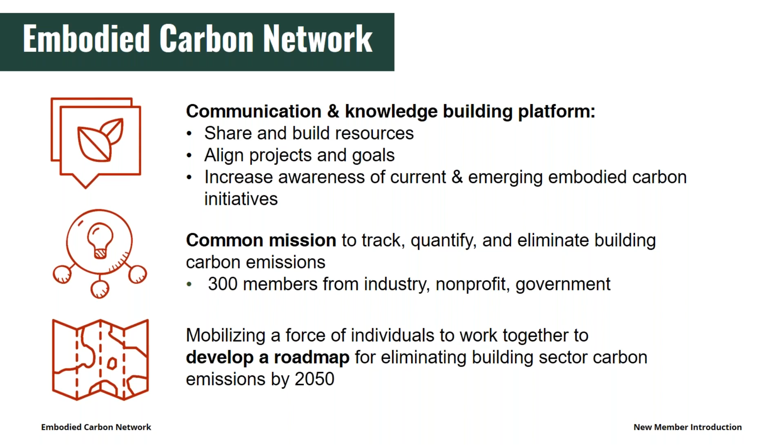Many of you joining us today are already members of the Embodied Carbon Network. We do have guests listening in who we invite to learn more and join the network. The Embodied Carbon Network is a communications and knowledge building platform launched in January 2017. The network brings together individuals working in or with the building sector to share resources, engage in discussion, and organize to take action. The network has evolved into a vibrant, engaged global community. To date, we are just over 300 professionals from across the building sector, academia, nonprofit, and government groups, representing 92 cities across the world.

While on the ground, our work to track and reduce carbon emissions may manifest in different types of research and development, technical work, tool building, education, and outreach. At the network, we connect under a shared mission to eliminate emissions from the built environment in order to meet carbon neutrality targets by 2050.

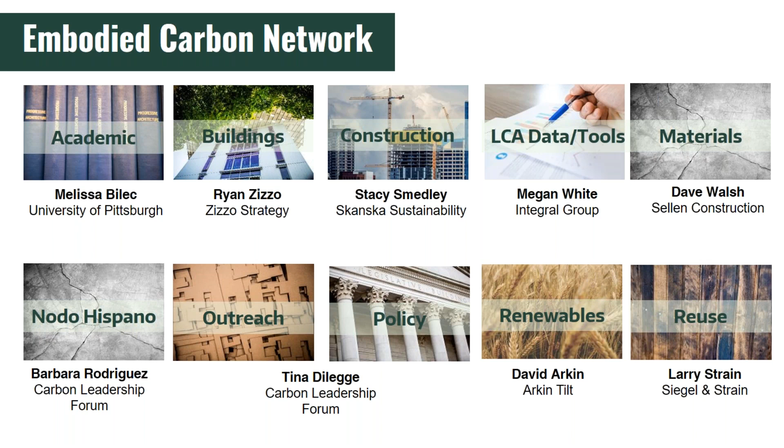Our members participate in different task forces, as you can see here, and the task forces are organized around specific topics. People can join one or as many as they'd like, and even create new task forces. These are spaces for focused discussion, a platform for people to talk in more detail about their work. I'll add too that our task forces have been the ones driving the development of each one of the webinars.

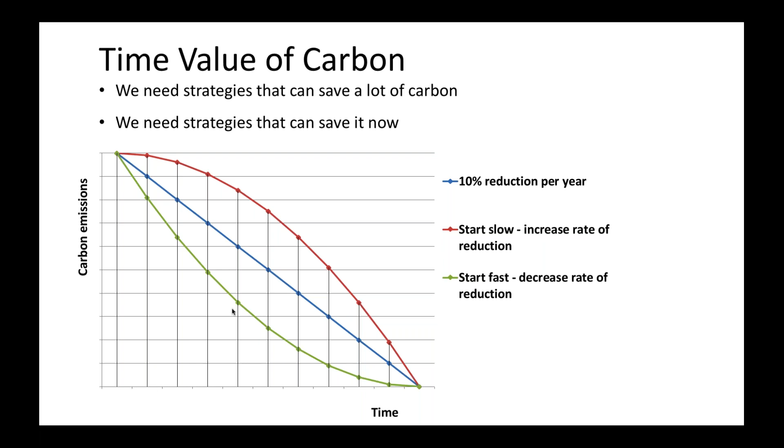This is just an illustration of that. Operating existing buildings represents one of the largest sources of greenhouse emissions, so that's how to save a lot. And embodied carbon, which is the materials in buildings, is also the first emissions that a building's responsible for. So it represents a way to kind of jumpstart this. It's a heavy hit early on.

To give you a big picture, globally, emissions from the built environment are about 40% of total emissions. 11% of that is from embodied emissions from building and construction, and 28% is from operating emissions, and that's operating all of the buildings we already have. So the point is, existing buildings are the problem for operating emissions, and new buildings are the problem for embodied emissions.

So one way to reduce embodied emissions is to build fewer new buildings. And when we upgrade existing buildings, we can lower operating emissions.

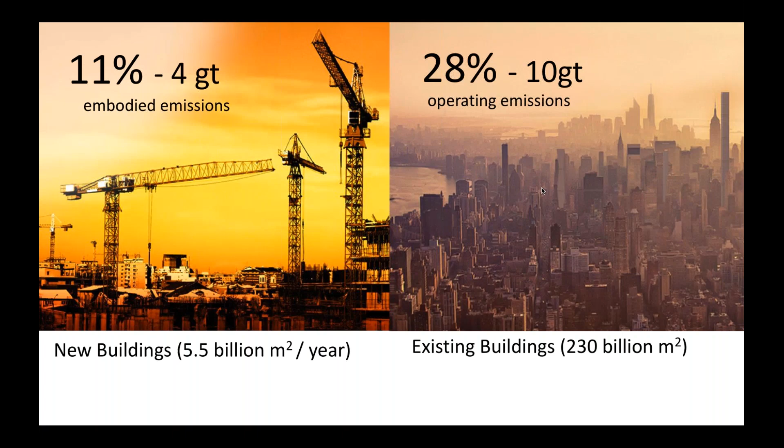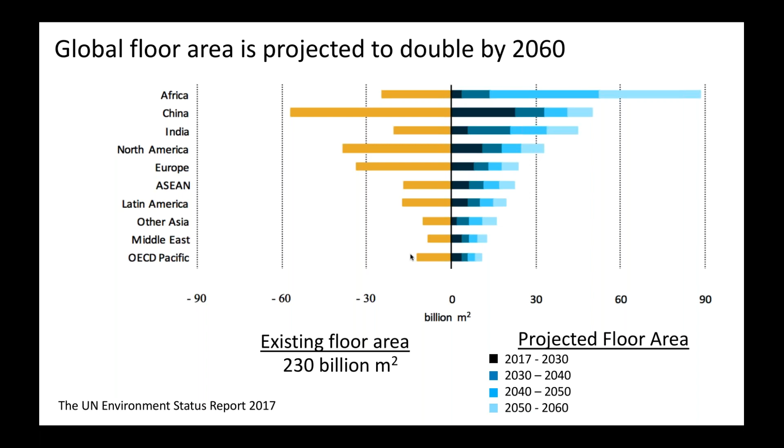These two facts, in my mind, represent a real opportunity. Over the next decade, the parts of the world that have the most buildings are also the places that we're building the most buildings still. So if we can reuse more of the buildings we already have, that might allow us to build fewer new buildings, which would save embodied emissions.

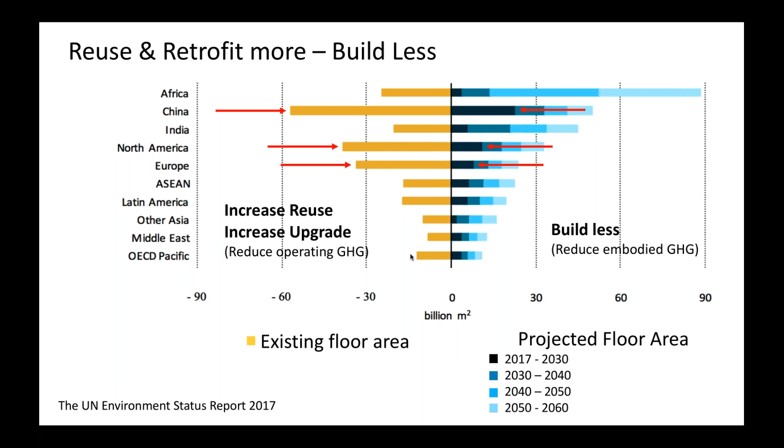And if we can make the existing buildings more efficient, we can reduce emissions from existing buildings. So on both sides, those three areas, China, North America, and Europe, are three huge opportunities for both saving embodied carbon and saving operating carbon from existing buildings.

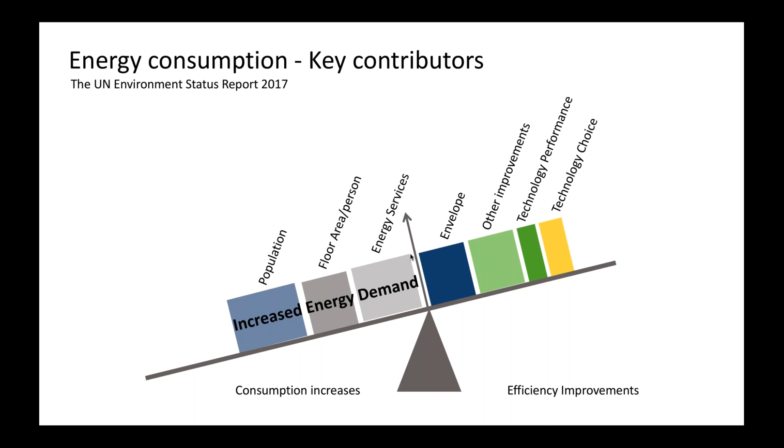I'm going to talk a little bit about energy consumption because it relates to this idea of upgrading existing buildings. Overall, our buildings are getting more efficient, but unfortunately, energy savings aren't keeping up with the increased demand, which is driven by increases in population, floor area, and increased energy services—more people are getting power to their houses and things like that. A lot of the energy savings are because of new buildings, not because we're making existing buildings more efficient.

One trend that can help lower emissions from new and existing buildings is decarbonizing the grid, and that's happening at a rate faster than we thought it would. So that's the good news. Envelope and technology improvements will continue to be important, but the biggest reductions may come from just cleaner electricity.

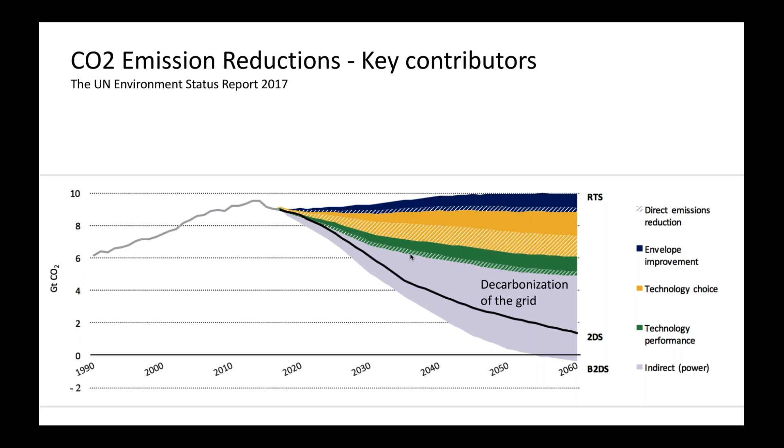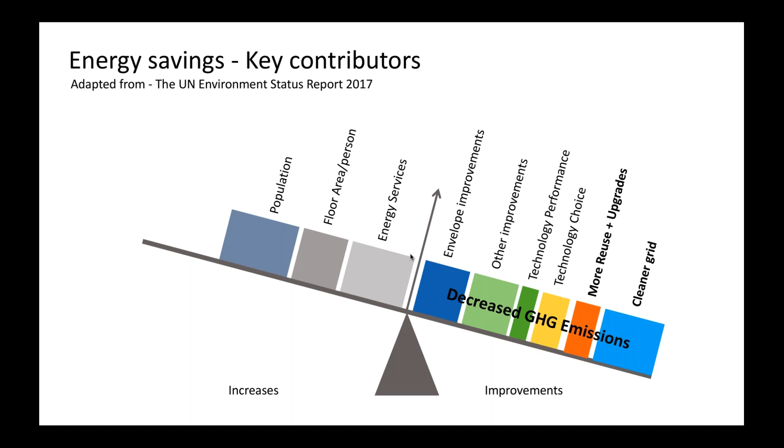And for buildings to take advantage of cleaner electricity, we need to stop burning fossil fuels for heat and make our buildings electric buildings, which includes converting existing buildings to be all electric. Overall, the UN Environment Status Report from 2017 says that we need to reduce total new emissions from buildings by 30% to stay below that 1.5 to 2 degree threshold we're trying to stay below. So more reuse plus upgrading more existing buildings, coupled with a cleaner grid, might just get us there.

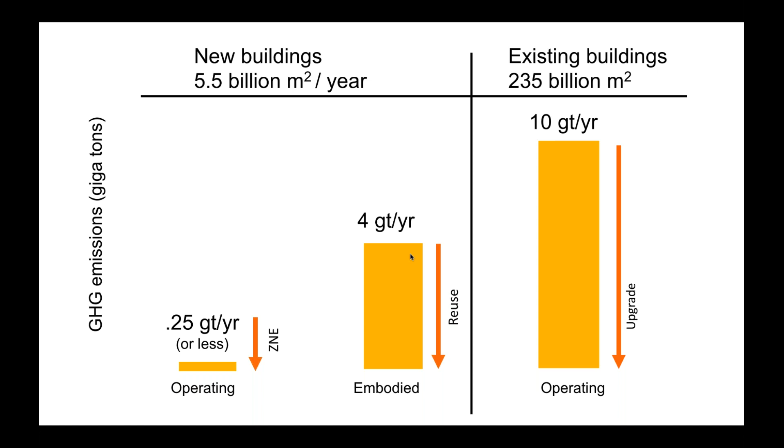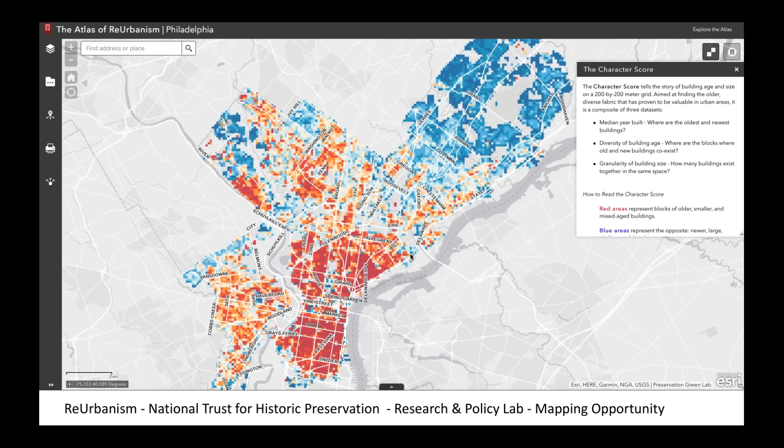So that's key. To reuse more of what we have, one thing we need to do is identify where the opportunities are. This is from the Atlas of Reurbanism from the Research and Policy Lab of the National Trust for Historic Preservation. It mapped—I think this is Philadelphia—areas where older, denser neighborhoods are prime candidates for reuse. The red areas represent blocks of older, smaller, mixed-aged buildings, which lend themselves to reuse. The blue areas are newer, larger buildings that may be more difficult to reuse.

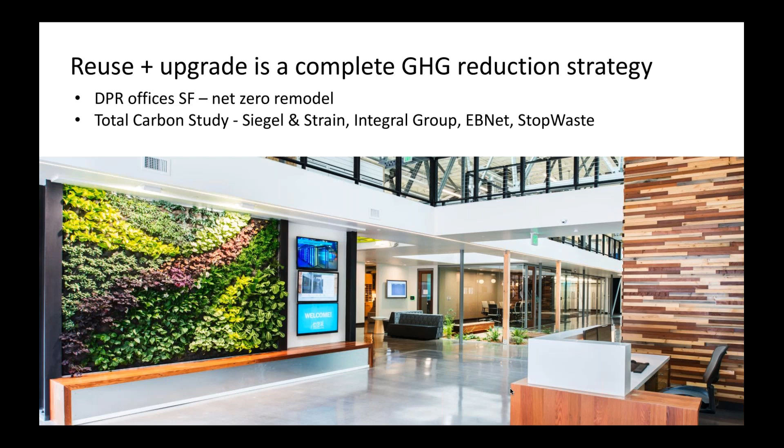A quick case study, which talks about reuse and upgrading as a complete greenhouse gas reduction strategy. These are the DPR offices in San Francisco, which is a net zero remodel of an existing building. After it was done—we didn't do the building, but we did a study with Integral Group, sponsored by Ecological Building Network and Stop Waste, on the total carbon impacts of this remodel. And we reused a whole lot of the structure.

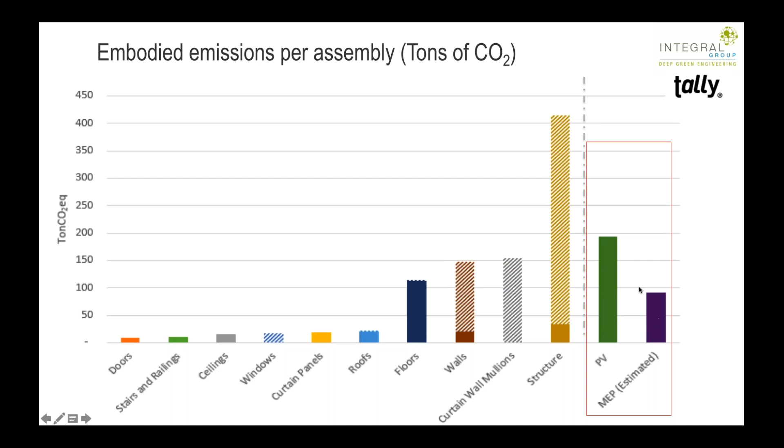And even when we added in the PVs and mechanical systems, which weren't in this tally model that we built, which doubled our embodied carbon, the added carbon from building PVs and MEP paid for itself in about 4 years of operating energy savings.

So the total carbon reductions: we switched from a gas electric building to an all electric building. Getting rid of the gas took out about 1,000 tons over 20 years. Energy upgrades and adding PVs took out about 4,000 tons. Reusing the building took out about 650 tons, and the total carbon reduction over 20 years was almost 6,000 tons.

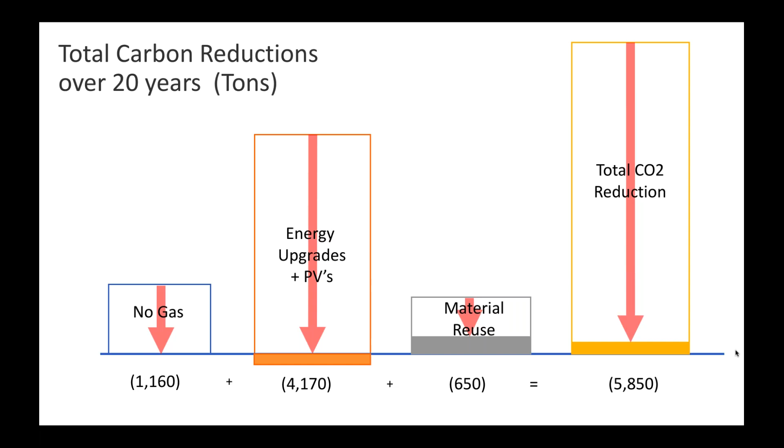So it's pretty significant. This was just a small 2-story commercial building in San Francisco, and it wasn't even an ideal candidate for a net zero remodel. It had shaded areas, and it still worked fine. We didn't even upgrade the building envelope very much, and they got to this kind of savings.

So that's great. I've been talking a lot about reusing and upgrading whole buildings, but that's not always possible. But we can still salvage and reuse the materials. And since most of the embodied emissions from construction are in the materials, this is critical. So I'm going to turn it over to Dave Bennink now to talk about salvage and reusing materials.

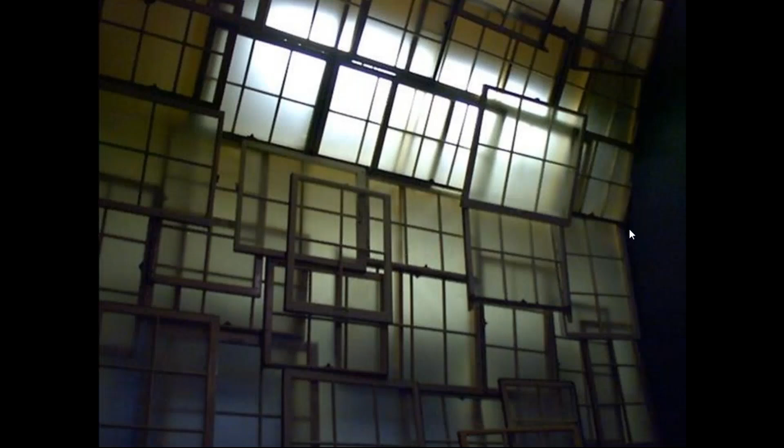So I'm going to take off from where Larry left off. As far as, you know, he made the case of reuse, I think, quite well. And so we're going to assume that we've made the decision on a project that some reuse should happen. Maybe the whole building should be reused, but reuse is a priority. And that's not true on a lot of projects. Reuse isn't considered, and often until the very last second, which is ironic because reuse is usually one of the first things you need to consider.

So we've made the decision to reuse. What is it that we need to do? Well, the first thing we need to do is be creative. I think that's one of the key points: what do you do with this material? How can you reuse it? Is it in some practical way? Is it in some artistic way? Is it aesthetic? Is it structural, etc.? And where does the material go and all of that? So we have a lot of decisions to make, but creativity is going to be an important ingredient.

So I want you to consider this point, that demolition can be the single most wasteful decision you make in your lifetime. I'll give you an example. EPA says that on average we dispose of about 4.4 pounds of waste every day, essentially throughout our life. So if you were to multiply that out over a 75-year lifespan, the total would be about 120,000 pounds. A lot of the buildings that we deconstruct, we try to get some estimate of what they weigh, and a typical 2,000 and some square foot home weighs about 120,000 pounds. So if you see the comparison there, your entire life you might throw materials away for 75 years, or you might make a single decision to demolish your home or building, and that single decision is a lifetime of waste. So that's just something to think about.

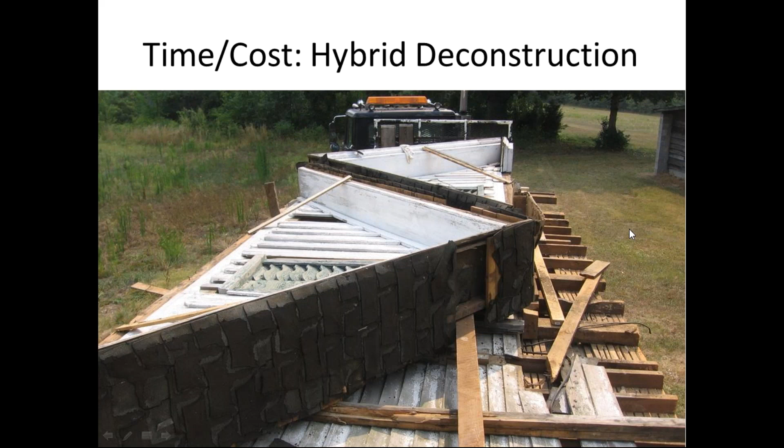The picture on the screen there was a historic home where they had to be relocated 200 miles away. So we found an intermediate way of deconstructing buildings, which we called hybrid deconstruction. And that came from looking at how people were manually taking buildings apart and how demolition people were mechanically demolishing them, and seeing how equipment could help us save these assemblies, as you can see in the photo.

So the next point is, you've decided to reuse. What is the reason you reuse? Well, a lot of the reason is you're looking to generate benefits, environmental benefits, or maybe social benefits, whatever that is. And of course, we're focused on carbon. So there's a hierarchy of reuse. And so the benefits that we're looking for, a lot of them come from saving that building in place, not completely removing it and replacing it with a whole new building, which has a lot of carbon impact, or carbon footprint. So the highest level you can reach is to save that building in place.

Another similar level is to move that building. In this case, we're just showing moving a small shed. There's energy input needed to do that. Sometimes there's some waste generated, some recycling generated by doing that, but it is a close second. It also is very difficult to move buildings, and it doesn't often work. So we go to the third level, which is to reuse assemblies.

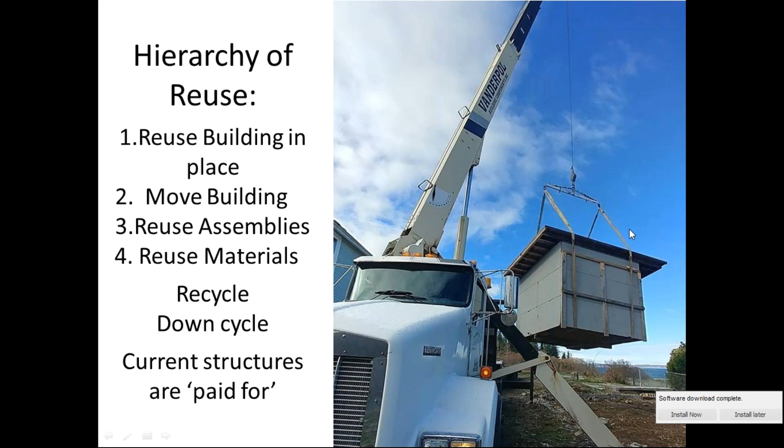I've seen some disturbing trends. If you look at where we've been going, we've taken down buildings. I've taken down buildings that are quite old. I've taken down newer buildings, and I see materials changing over time. It's no mystery to anyone that has ever looked at some old reclaimed wood and been amazed by the quality and character of it, and then compare that to newer foam trim or something like MDF trim, where you see the difference in quality.

So what we're seeing is in some of the newer buildings that we're taking apart, some of the materials are really lacking in quality, lacking in durability. In fact, it seems to me that a lot of the new materials that you buy today will have to be purchased 3 times compared to what materials used to be purchased, because they just don't last as long. And honestly, we're slowly becoming numb to that fact, where we assume we're going to have to replace these materials because that's just the way it is.

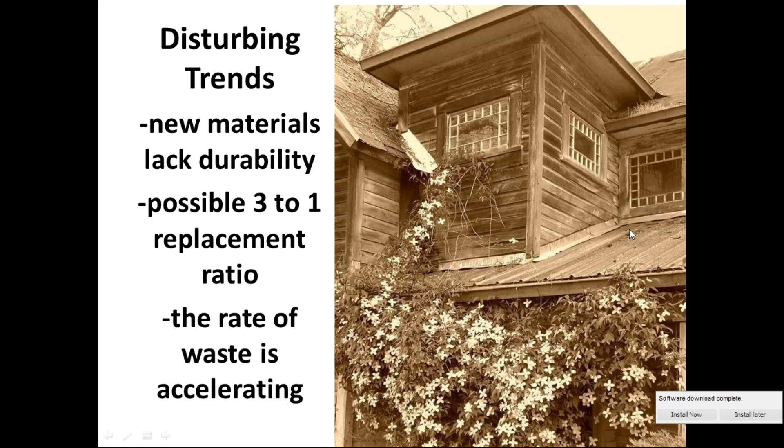And a couple of days ago, I was working on a building that's 157 years old, and that siding, which had sat out for years, unpainted in the weather, was in perfect condition. It just amazed me compared to what you might buy today. So the rate of waste is accelerating, and no one seems to even realize it.

Now we have to talk about what are the avoided impacts of reuse versus new. I just gave you one. If materials from the past lasted longer, then they didn't have to be replaced as frequently, and that's a benefit. It's also true that these materials have been paid for, so essentially their impacts on climate have already been taken into consideration, and using them again doesn't add to that. So lower carbon emissions from saving these materials, keeping them in use.

Embodied energy is preserved. We invested energy in all these buildings. The energy had an impact on the environment, so why would we waste that embodied energy by wasting the materials and starting over again?

I like to think that I've saved thousands of acres of forest land by saving the wood that someone would have to cut new trees down to manufacture and then sell. We're an alternative to cutting trees down. I have never cut a tree down in 25 years. Why would I? I have all of these buildings full of trees that I'm saving so that you don't have to cut trees down.

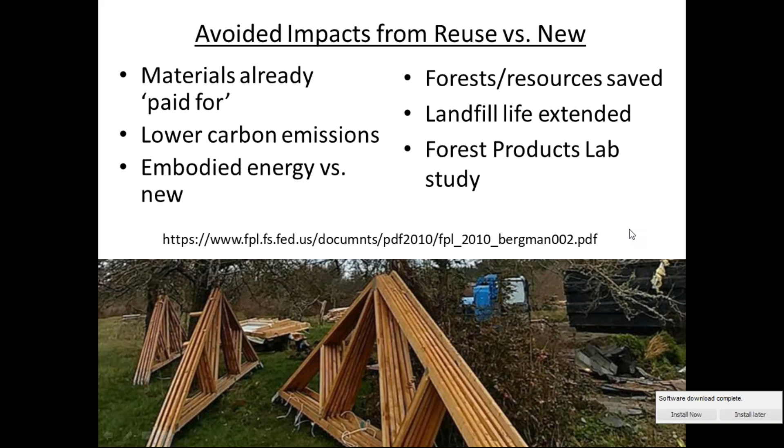Okay, and the last point of this slide is that the Forest Products Lab conducted a study comparing reclaimed flooring and reclaimed framing members to manufacturing new flooring and new framing. What they found, in a quick summary, was that by salvaging the wood, you saved 11 to 13 times as much energy, and you generated 3 to 5 times less greenhouse gas emissions. So there are definite benefits to salvaging materials, and those numbers show that.

Now, there are lots of benefits to reuse. One we focus on a lot is owner reuse, where we try to get the owner to reuse some of their own materials in their new structure. That's assuming it's been decided by others that there will be a new structure. Of course, we try to get them to reuse the structure. If that's been eliminated, then we try to get them to reuse some of their materials on site, which is the most sustainable thing they can do at that point.

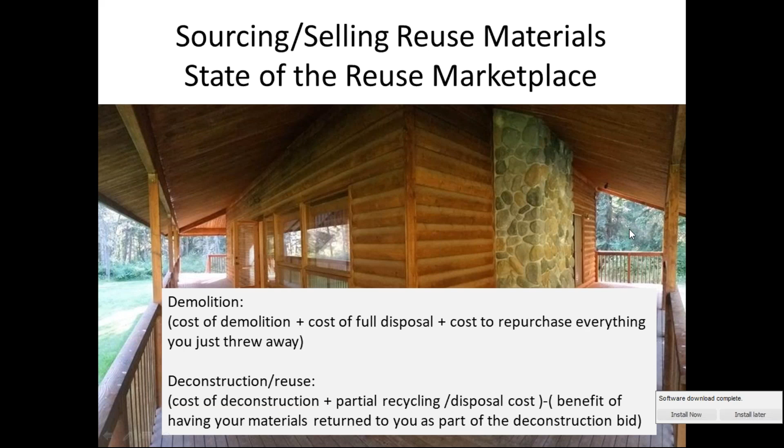But when you think about it, you pay to demolish a building, you pay the full cost of disposal, and then you have to go out and buy everything you just threw away all over again. When you hire someone to deconstruct the building, you have the potential of reusing your own materials. Maybe that initial cost is higher, but there's no benefit of demolition. The benefit of deconstruction is that you could have all of these materials returned to you, and that benefits you financially because you don't have to buy them again. When you do the math, you find that deconstruction often is the cheaper option.

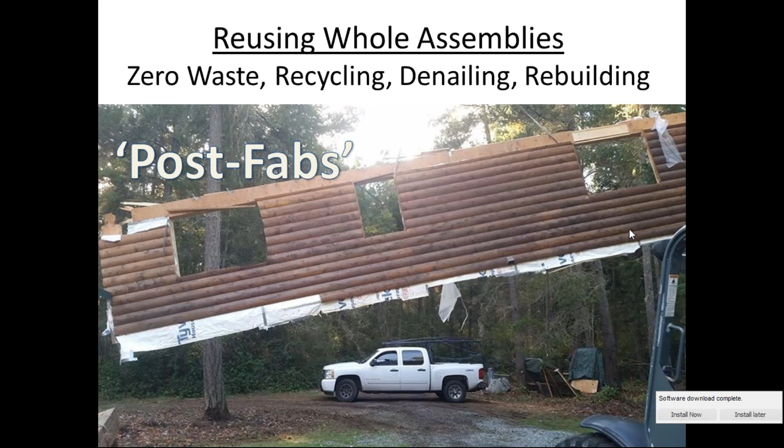So if you needed an 8x12 shed, I could cut you 2 walls that are 8 feet wide and 2 walls that are 12 feet wide, and then I would literally cut out an 8x12 section of floor, and you'd be well on your way to building your 8x12 shed by just buying those 5 assemblies, those 5 panels. So instead of calling them prefabs, we call them postfabs.

An example of that is this project where the owner chose to reuse their own sections, their own postfabs. They were removing a larger structure, and then they had use for a smaller structure that they were going to have on the same job site. So we were able to remove sections of the roof, sections of wall and the floor, and those sections were transported off-site for a time, and then retransported back to the site and constructed into a small storage shed.

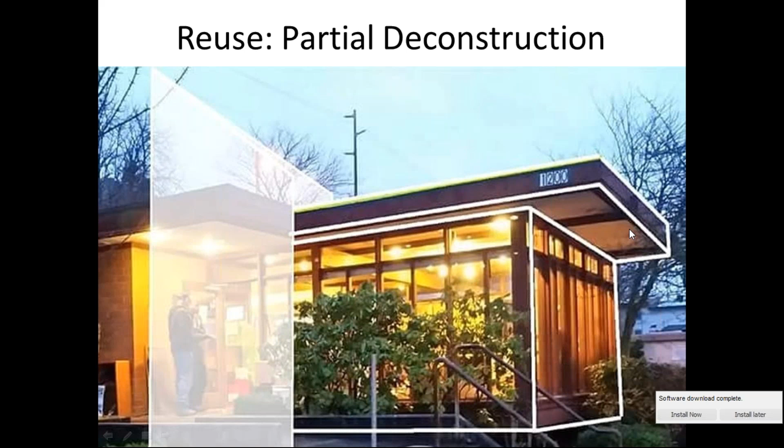But the point is that when they did the math, they found that it benefited them financially. A lot of times we're not focused on the environmental benefits enough, because our clients are often not focused on their environmental impact. They often try not to focus on that because since demolition is the standard practice, no one wants to think about that because it's such a negative all around. But this project is an example of how carbon was sequestered, embodied energy was saved, materials were conserved, resources were conserved.

Just briefly about some trends in deconstruction and reuse. Cities are starting to catch on. They are starting to look at the bigger picture benefits of reuse: they're seeing job creation, historic preservation, the benefits to the environment, and the benefits to health when it comes to concerns about lead and asbestos and demolition practices.

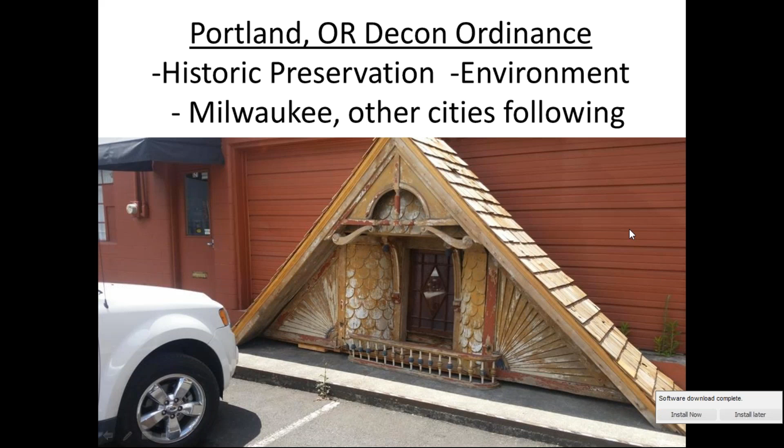So Portland, Oregon has made the decision that any house or duplex in the city of Portland that's 100 years old or older has to be deconstructed. They're talking about increasing that date from 100 years old to somewhere in the 1930s and older. Milwaukee has now started their ordinance, and there are similar ordinances in Vancouver, BC, and other cities. And there are other cities that are considering doing this.

So I just have a couple more slides. How are we going to achieve this material reuse, and what are some of the barriers? I have a comparison, success and failure. If we want to be successful, we need to allow time. Time is required to come up with these creative solutions. Time is required to find homes for these materials. If you fail, it might be because you didn't allow enough time.

We need to control the costs of deconstruction by coming up with ideas like hybrid deconstruction or not handling things twice. Failure usually relates to bidding on something and not having a good enough plan, and then the costs of deconstruction and reuse are too high.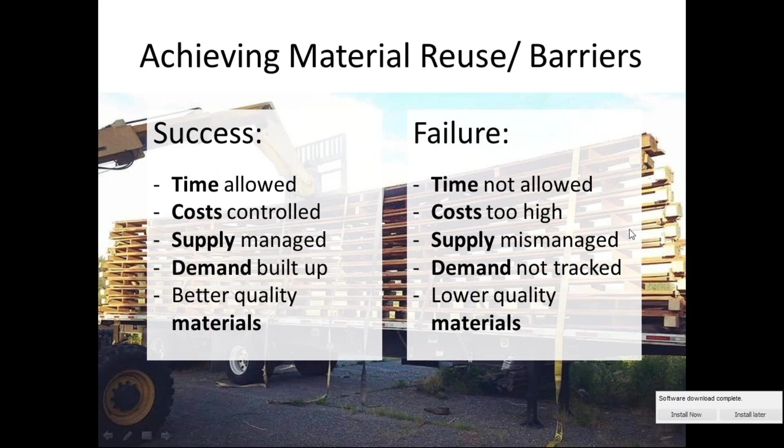Supply is managed or supply is mismanaged. We need to have the time to manage your supply and demand. In our case, we try to build up demand for something like bricks before we ever get a brick building. So if we already have people waiting for 100,000 bricks, when we get 100,000 bricks, you can see how that makes everything better for us.

And then, of course, we can't control this, but the better quality materials, the better reuse works.

So the final point is that we need creativity, we need time. When it came to something like this roofing, it almost could be written off as just something you can't reuse, and that you need to just move on to something else. But to me, it looked like honestly the most reusable thing in the building, because we cut out strips of it—9-foot by 20-foot, 50-foot, 100-foot strips of this roofing—roll it up, and it's extremely useful.

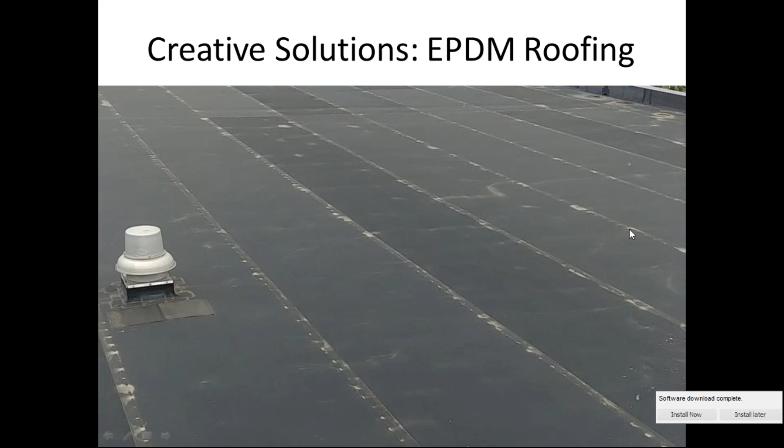This is something that the people that created the product probably never thought would be reusable, at least in part, because it's a 10-foot wide sheet that becomes 9-foot. But it is something out there. We're having to be creative because these materials weren't meant to be reused.

I think that's something Brad specializes in, which is thinking about how to reuse things before you build the building, like designing for disassembly and so on. So I'm going to hand it over to Brad.

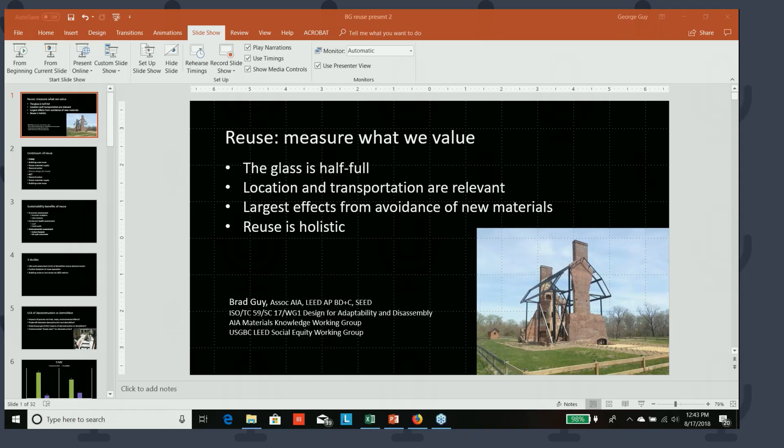And he's going to be talking about metrics related to carbon. Great, thank you so much, Dave.

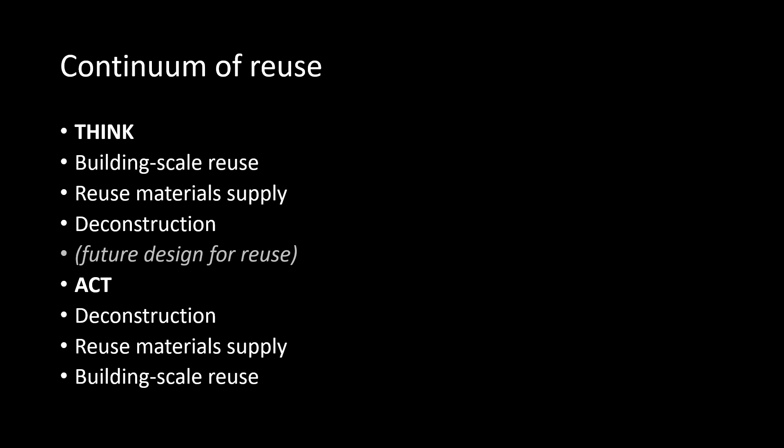So this is really related to a lot of things that Larry and Dave talked about, and really trying to put metrics to these aspects that were discussed. The themes I'd like to talk about are, of course, reuse is what we already have. There's a very different paradigm here compared to new materials. When we generally look at new materials, manufacturing is the largest impact. But for reclaiming and reuse, there actually is no manufacturing, so other impacts become more important. We think a lot about waste and avoiding waste, but actually the substitution of materials is very, very important, and how holistic reuse can be, and we try to put metrics to that as well.

I think Larry made the point that we have to start with whole building reuse, but to make this connection it is also to provide materials for adaptive reuse that might be compatible, and to really respect every scrap. So I like to think of it as, well, we can think at the large scale, but in an everyday context, everyone can reuse. We all do this in our daily lives without even really thinking about it. And the aggregation of that can end up becoming a very large scale, as I think Dave alluded to.

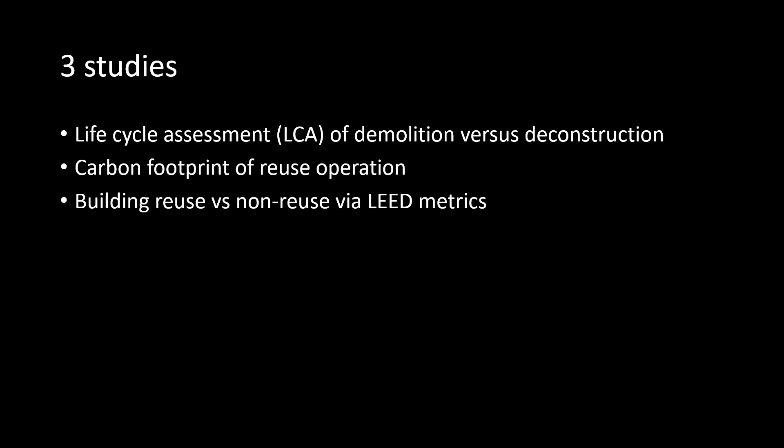We know the benefits sustainably for reuse, so here we're just going to focus on carbon for the sake of this forum. I have 3 studies, and I tried to put these in the continuum that I just mentioned: looking at demolition versus deconstruction from an environmental LCA perspective, looking at the carbon footprint of a reuse operation—actually happens to be Community Forklift here in Washington, DC area—and then using LEED credit scores as a way to ask some questions about building reuse versus new construction, and how they might shake out comparably in terms of energy performance, site benefits, and other benefits.

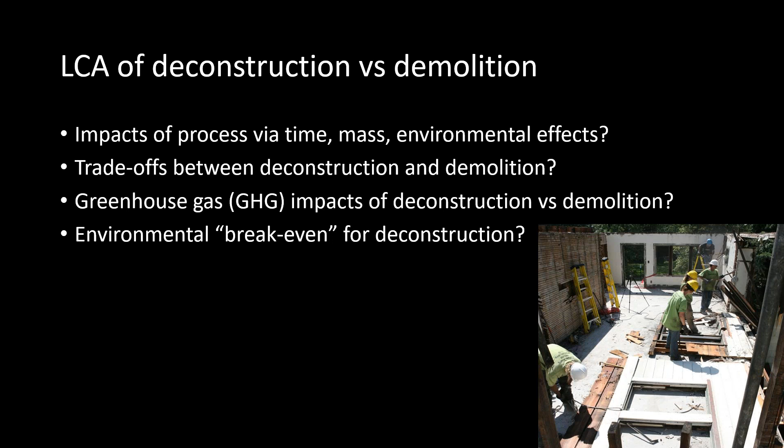Okay, so what are some of the questions we might have about deconstruction and demolition?

So time was mentioned before. That's a big factor when we think about this, how much we can actually recover. But what we typically don't measure truly is the CO2 and embodied effects. And that's the kind of metrics that we need going forward. And then how can we make this kind of break-even point? So what are the real effects, and what kind of decision-making might result?

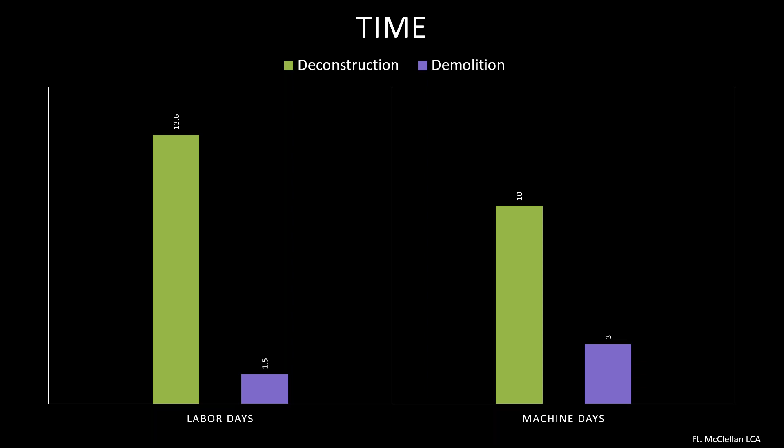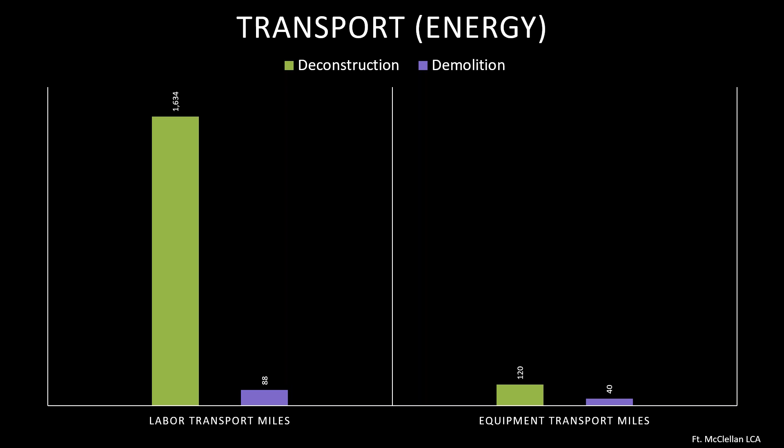It's no surprise that salvaging or deconstructing a building takes a lot of time. It takes a lot more time than demolition, even for the use of machinery. So thinking about support machinery that goes into the project, and all of this is burning diesel typically, or some other kind of fossil fuel.

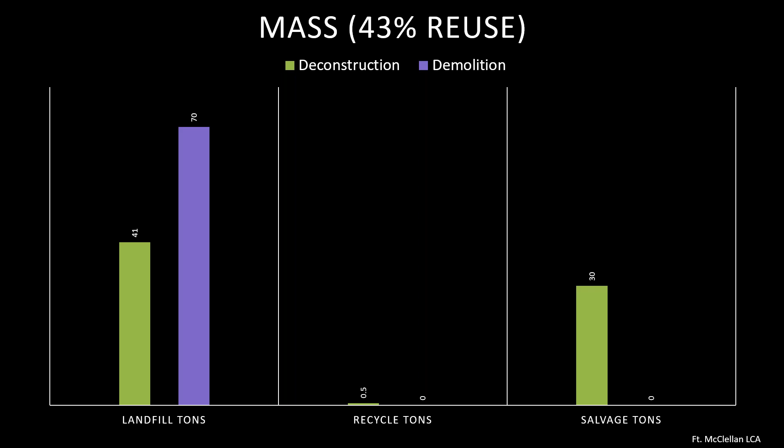I was actually a little surprised to learn from the study how important transportation becomes. So again, if you think about the manufacturing inputs are zero in this life cycle of a product, if we're assuming we're producing products from deconstruction, then transportation actually becomes a pretty important factor. And further, for deconstruction, if you're spending more time on a site, you are actually transporting workers quite a bit more than a demolition, which is a very fast process.

In this particular project, a lot of times, of course, buildings that are slated for demolition are not in the greatest shape. So we're not deconstructing brand new buildings. We have older buildings, and we're trying to get what we can out of them. So even at this very modest scale of only 43% reuse that we could achieve in this project, you can see there are still significant landfill impacts from the deconstruction.

But demolition is basically disposal. So it's the removal of a building resulting in disposal. So those impacts are very high in terms of quantity. And then you can see that salvage, of course, is really all for deconstruction and zero for demolition.

Okay, so here's the irony. The things that we pay for, like equipment, time, and labor, are the impediments, as Dave mentioned. But if we look at it from a CO2 perspective, they're actually not really the biggest impacts. So we kind of have a perverse situation here, as we all know.

The environmental effects from not recovering materials are in the disposal of those materials, and the benefits are in the recycling and salvage, by a very large margin. If we just look at this as kind of a relative chart, although the numbers are there, you can see these effects on the environment are many times over the idea of time and labor and so on.

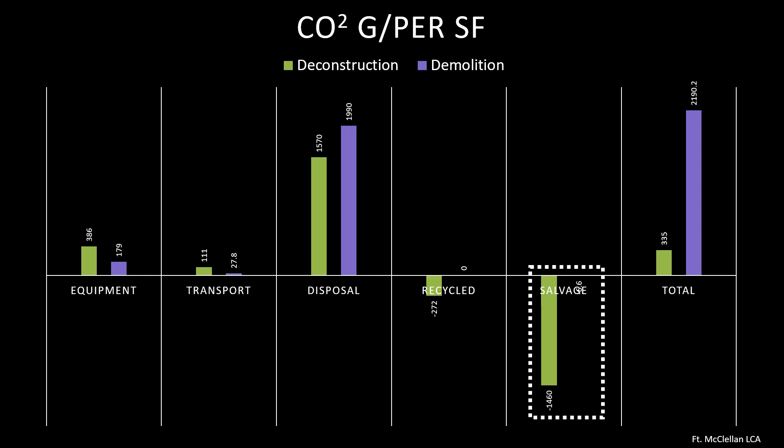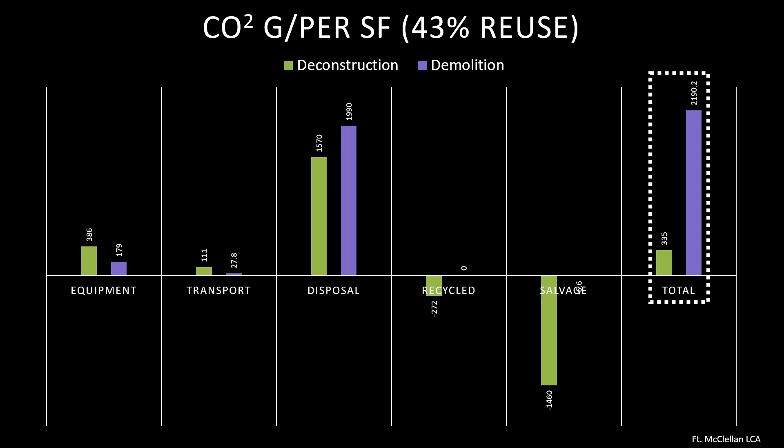And so disposal is a very large greenhouse gas source from demolition. Salvage clearly is the debit, the credit. So we are assuming that we're avoiding new materials by using these materials again. And then there are still impacts. So the interesting thing here is we only had 43% reuse, so we actually didn't achieve a kind of net balance. Although the demolition caused about 7 times more greenhouse gas emissions than the deconstruction, the deconstruction still had impacts.

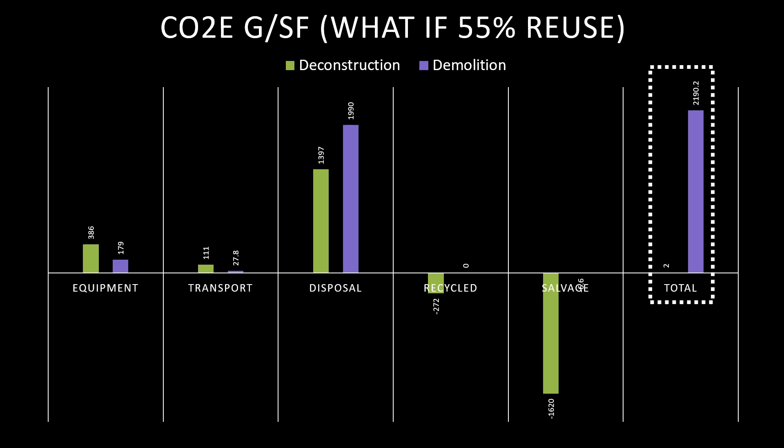So just for the sake of this presentation, I did a what-if. What if we just improve the efficiency by 12%, actually getting to a threshold, let's call it 55 or 60% recovery? In terms of net impacts, it's zero. The deconstruction literally pays for itself in avoided impacts.

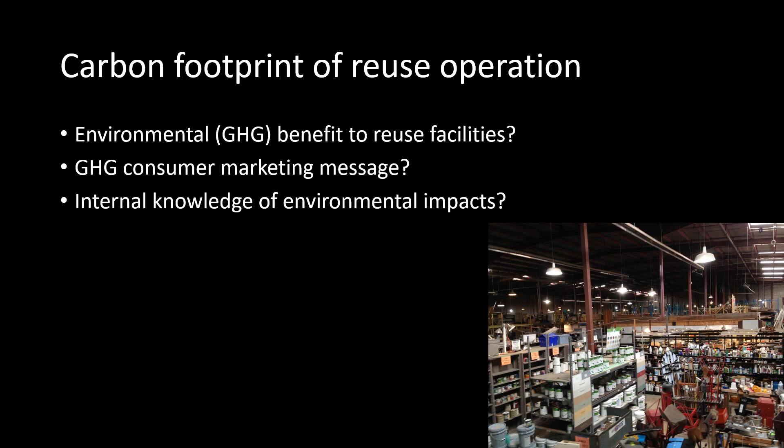The next case study is looking at the carbon footprint of the reuse operation that I mentioned here in DC. So the questions to ask: is there a benefit to having a reuse facility? Is it a carbon sink, was my question. How could this facility communicate an environmental message? So your $1 purchase, your $10 donation to our firm would actually result in this kind of benefit. And then for their own use, how could they look at their environmental effects and make improvements in their operations?

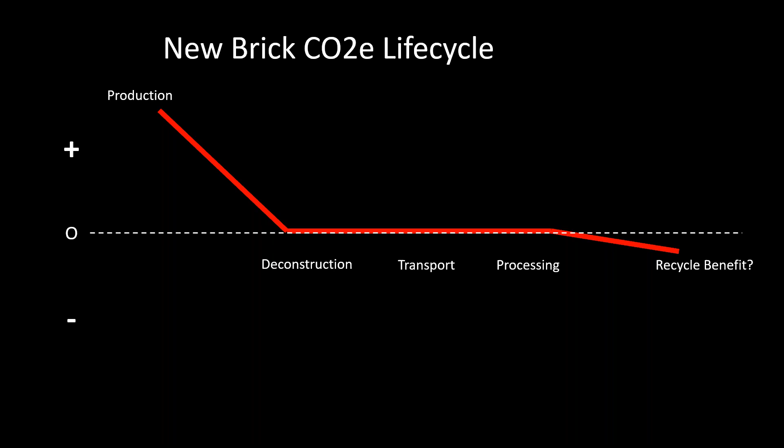I think it's really important to just emphasize this basic idea. What are the impacts of materials? They're vastly in the simple production, and things like transportation, the construction process, and even disposal are a very small part of the total life cycle greenhouse gas of a typical product. And we're not even sure if there's going to be a recycling benefit or not. The default is typically disposal.

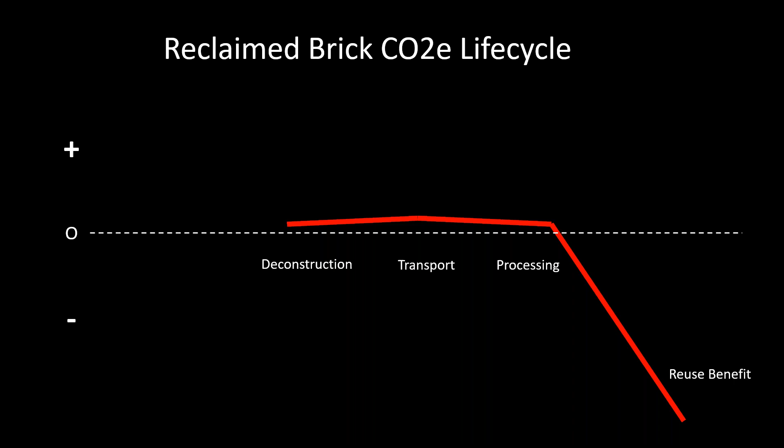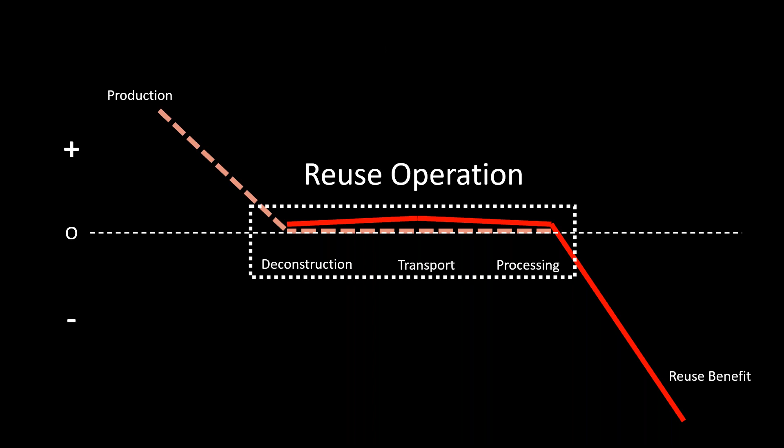But when we recover something, while we may increase something like the transportation effects of doing that, what we're doing is literally sort of mirroring the process. It actually, I didn't realize this was going to happen until I drew it, but if you just take away one thing here, it's the idea that reuse is like a mirror. It's really like a flip of the effects of the built environment. And perhaps we can think about that reflection back onto what we have as a way to go forward.

But the pinch point is that middle piece. So we have to make the connection between having materials and making them available. So in the life cycle assessment, really a carbon footprint assessment using scope 3 parameters.

Interestingly enough, the largest impacts were the store itself trying to pick up materials from the local community. So they would drive a truck about 60 miles a day, every day, to pick up donations.

And that was actually their largest operational effect. Also surprisingly, with the white goods that they collect and the metals they might have around, the recycling benefit of just having those and sending them off to a scrapyard was also a very significant benefit for them.

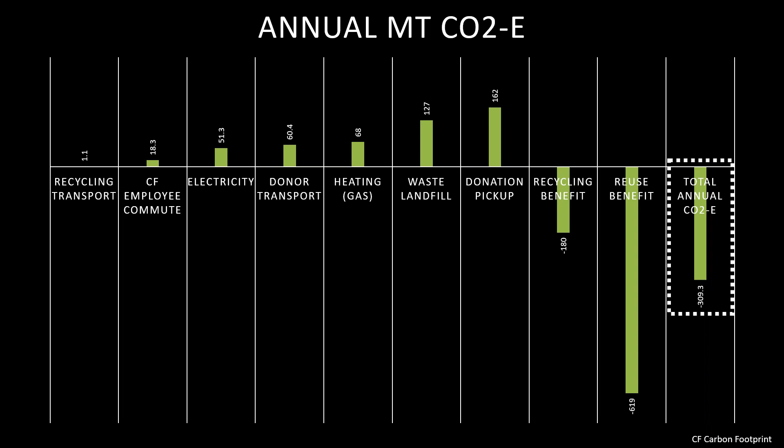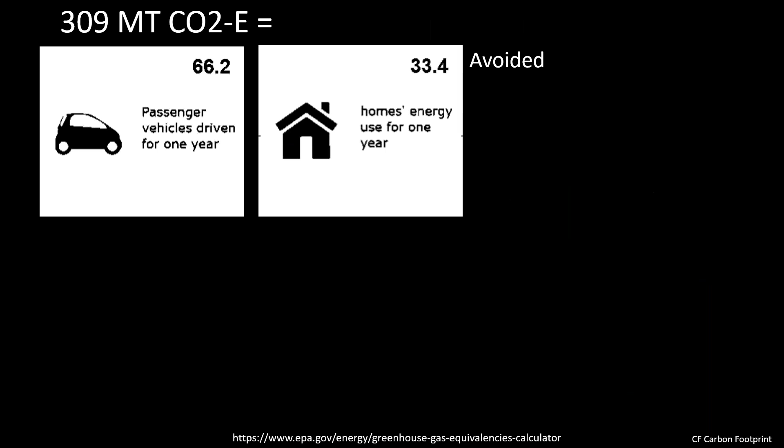But of course, the reuse overall was the largest benefit. So between recycling and reuse, they're actually avoiding about 800 metric tons of CO2 equivalent per year. And if we net that out, that's about minus 309 metric tons of CO2 per year for this store. Looking at the EPA calculator, that's about 66 passenger vehicles off the road in a year.

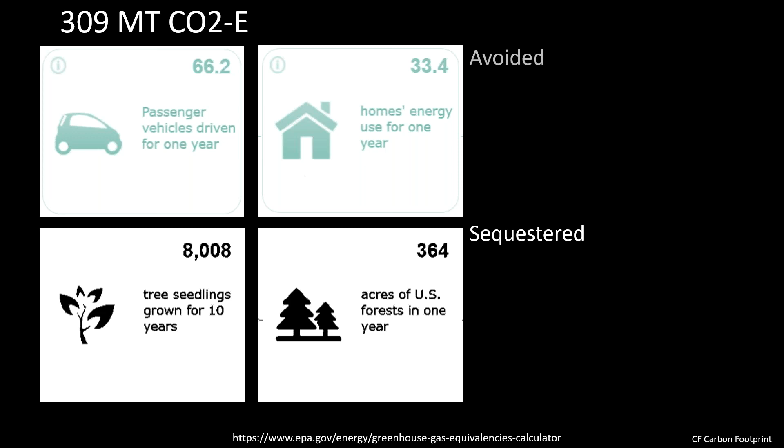That's avoiding 33 homes' energy use for a year. If we wanted to think about it in more sequestering terms, about 8,000 tree seedlings grown for 10 years, or 364 acres of US forests sequestering carbon in one year.

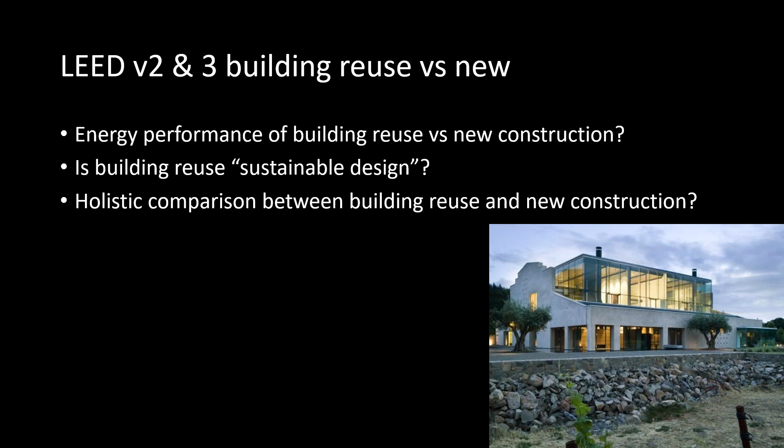So I think the first point is proven that reuse is a sink. And if we want to think about ways to subsidize, and we need to always think about other ways to value, the carbon benefits are pretty clear.

This last study is looking at LEED projects, version 2 and version 3. My questions here were: okay, we know there's a benefit to adaptive reuse, but what are the overall benefits? Are these buildings performing at least as well in terms of energy? Are there other kind of characteristics, like the site or indoor environmental quality, that might be better or worse? We need to look at this from a holistic perspective.

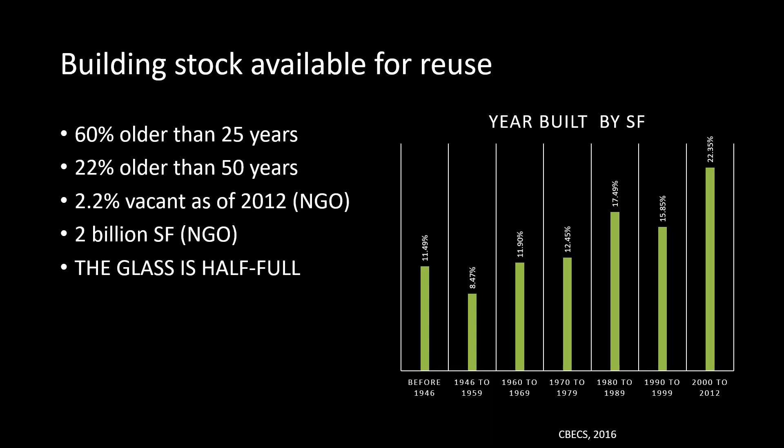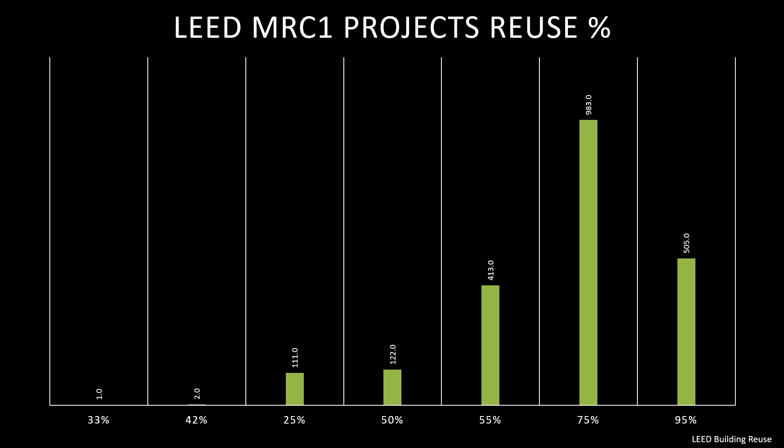Back to the point Larry made, summarizing this, about 60% of commercial buildings in the US are older than 25 years, and 22% are older than 50 years. At any given time, we have about 2 billion square feet of vacant building in this country. So it's not even like we have to kick somebody out — there's a bunch of buildings sitting around just waiting for somebody to use them.

It's also worth noting, amongst the projects I looked at, about 2,000 projects achieved the building reuse credit. On average, they were doing about a 75% renovation as measured by the LEED system. For core and shell, I had about 1,500 projects — 200 were adaptive reuse, 1,300 were new construction.

I don't know if you'd be surprised, but in version 2, actually, the core and shell adaptive reuse projects were achieving higher energy reductions on average than the new construction projects. In version 3 of LEED, the new construction projects caught up, basically. On average, across the board, these projects were achieving about a 25% energy reduction.

I should note, between version 2 and 3, ASHRAE 90.1 changed, so I did normalize the credits against the change in the energy standards.

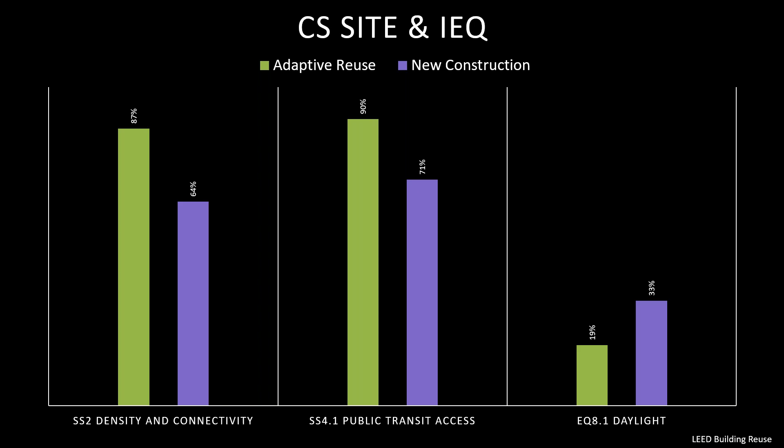Are you surprised that for site characteristics, the adaptive reuse projects on average achieve more credits, statistically significantly? For example, 90% of the core and shell adaptive reuse projects achieve the public transit access credit, compared to only 70% of the new construction projects.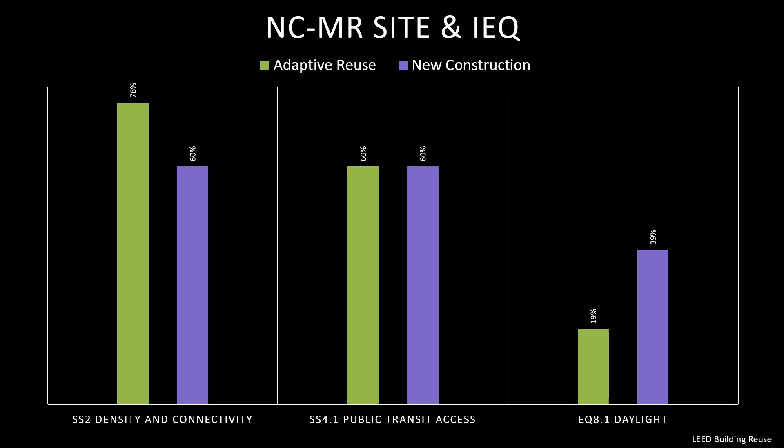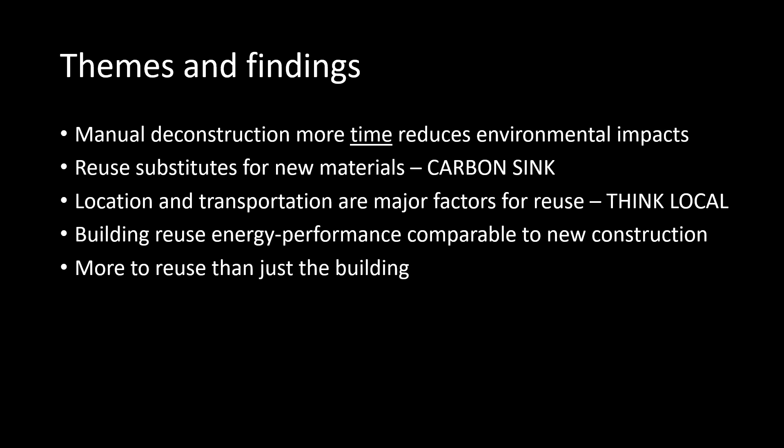But the same trend continues around urbanity and other benefits. Density and connectivity credits — adaptive reuse always scores better, though new construction has caught up. So is that maybe doing more demolition in urban areas, or is that increase in public transit? This doesn't answer that question, but they are at least equal in terms of the environmental and greenhouse gas benefits of access to transit, while daylight remains in a similar state.

So just to summarize, we know that salvage takes more time, and the things we pay money for are really sort of a perverse measure. And when we look at it from a greenhouse gas metric, there's no comparison between reuse and other forms of building disposition.

Reuse is a carbon sink. I've heard talk about trying to use carbon offsets around building improvements, and I think the more we can illustrate that actually that is a kind of investment that can be made would be good.

And the locality, so we know things about historic character and urban areas, but reuse is local, and there's a lot of reasons for that. Ultimately, it's also reinforcing, I think, what Larry alluded to, that we're building the assets within that community. Building reuse isn't necessarily going to cause a lower energy performance, given all things equal, not necessarily striving for some net zero energy. But there's way more to reuse than just the building in community contexts.

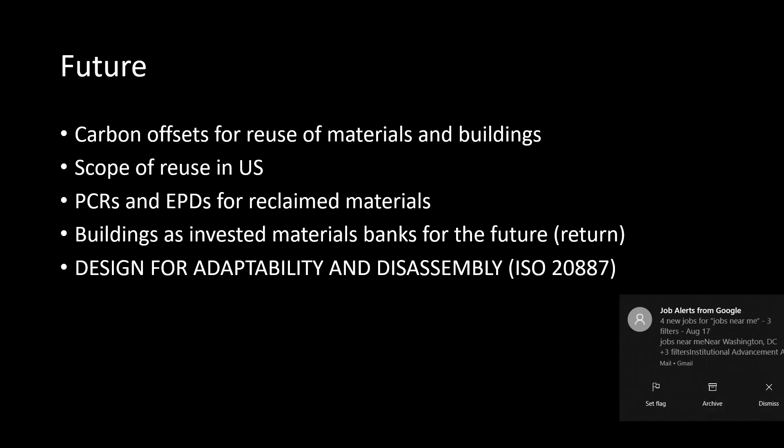So we need to work on carbon offsets for the reuse of materials and buildings. We need to understand the scope of reuse in the US and really get robust data around cost and benefits. I think we really need to work on PCRs and EPDs for reclaimed materials so they can be in that system. And when we do those analyses and we see how, sure, maybe transportation goes up as one impact, but manufacturing basically goes to zero, we can really understand the differences between new materials and reused materials.

And buildings are materials banks. They are a stock. And I'm very excited about working on a new ISO standard for design for adaptability and disassembly. That should be coming out next year, and I hope that would help guide some of this forward. So thanks very much.